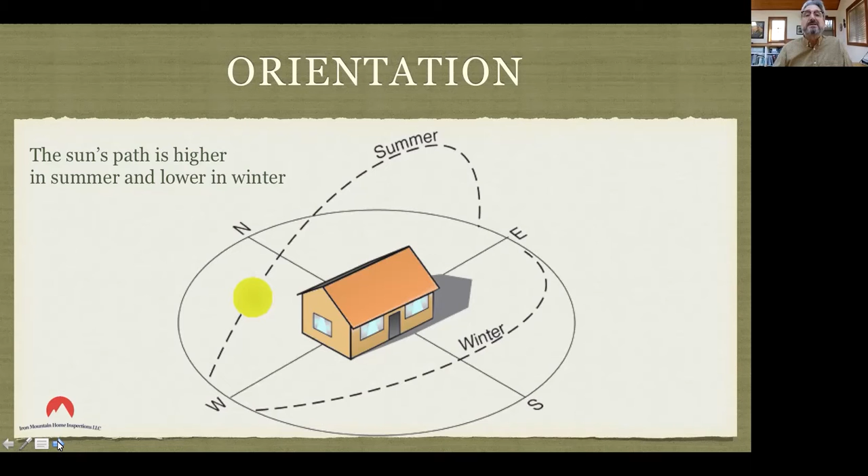Well, the reason this is important, the fact that the winter sun is lower and higher in summer, one main reason, there are others, is because many houses have wonderful, deep porches. It's a great place to sit in a rocker and enjoy the shade and chat with passing neighbors.

But a well-designed porch does more than that. Smart builders plan the depth and the height of the porch to admit low winter sunlight and shield out high summer rays. So that's a big part of porch design. Now you'll be looking at me again. So I want to talk now a little bit about thermal. Are there any questions, by the way, about siting of houses?

Okay, so let's talk a little bit about thermal mass. You've probably all walked into an unair-conditioned old house in the summertime, and you've noticed that it's comfortably cooler than the outdoors. That's thermal mass at work. While thermal mass and modern insulation both help keep houses warm in winter and cool in summer, they work in very different ways. Essentially, insulation works like a thermos. It blocks heat from flowing in or out.

But thermal mass, on the other hand, acts more like a battery. It stores heat. Then once it's saturated with heat, or the ambient outdoor temperature drops, it begins releasing that warmth as slowly as it absorbs it. Now, before insulation came on the scene, builders relied on thermal mass to help keep homes at a comfortable temperature. They did this by building with solid stone or brick.

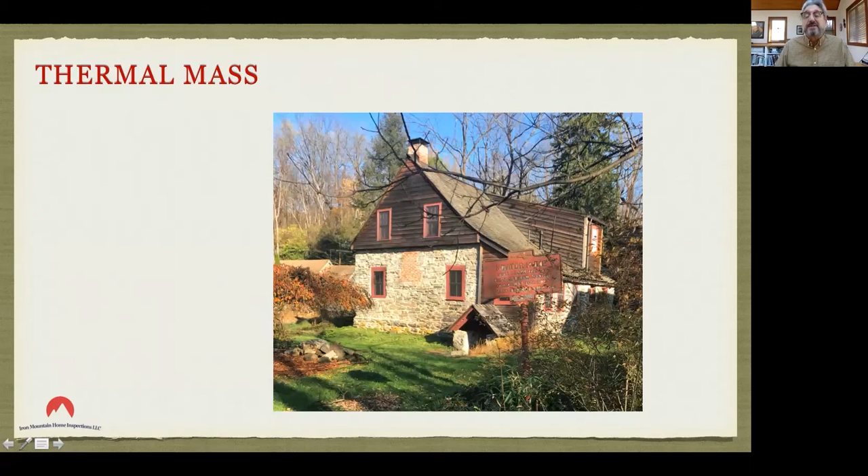In the case of timber frames, they often filled the walls with rubble stone. The rubble didn't have a structural purpose. It didn't help hold the house up or anything. It just added thermal mass. In addition, old-timey plaster also has more thermal mass than modern drywall does.

So dense materials like masonry slowly absorb lots of the sun's warmth during the day and release it during the night. This mediates the temperature in the house. It's cooler on summer days and it's warmer on winter nights.

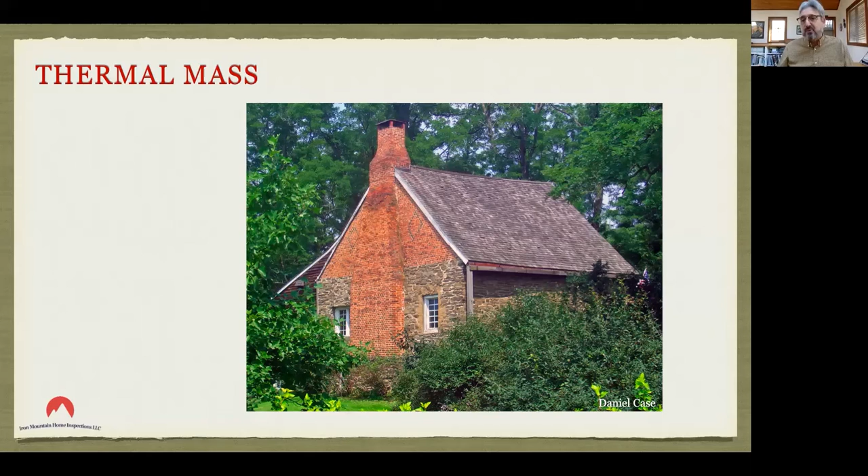Now, in our climate, thermal mass alone usually isn't enough to keep a home at the nice, steady temperature that modern folks have come to expect. But it will still reduce reliance on mechanically heated or cooled air, especially if the house has been retrofitted with insulation. In my old house, again, for example, it's on a shady lot. So that combined with the thermal mass, we often don't use our window air conditioners until August.

So any questions about thermal mass and how it works? Okay. Dave, are you going to touch on geothermal systems by chance? I'm not today, no. Because I don't know that that's really an old house issue. Pretty much the same for an old house or a new house, I would think.

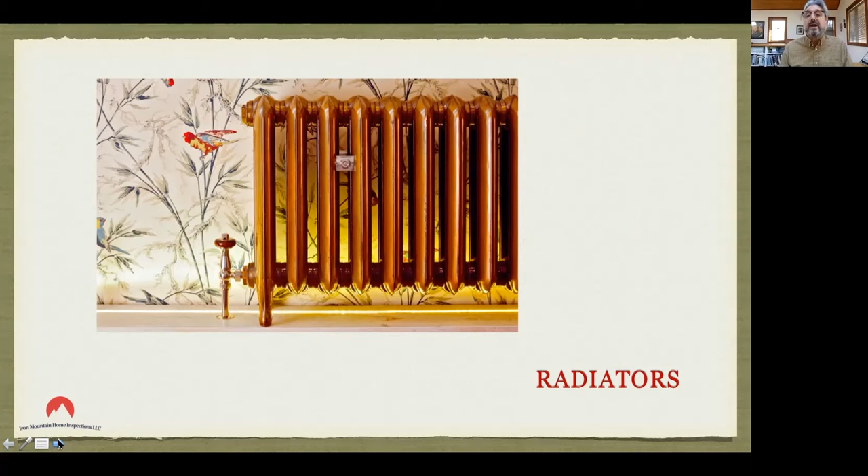Now, but I do want to touch on radiators. Speaking of mechanical heating, hot water radiators are the most common central heating system in old houses. You'll also occasionally find steam radiators. And while radiators have been in common use since the late 1800s, they're still the best way to distribute warmth throughout a house. Radiators use less energy than forced hot air systems. They provide a more consistent temperature, and they're quieter than forced hot air systems. And they don't blow dust and allergens around the house.

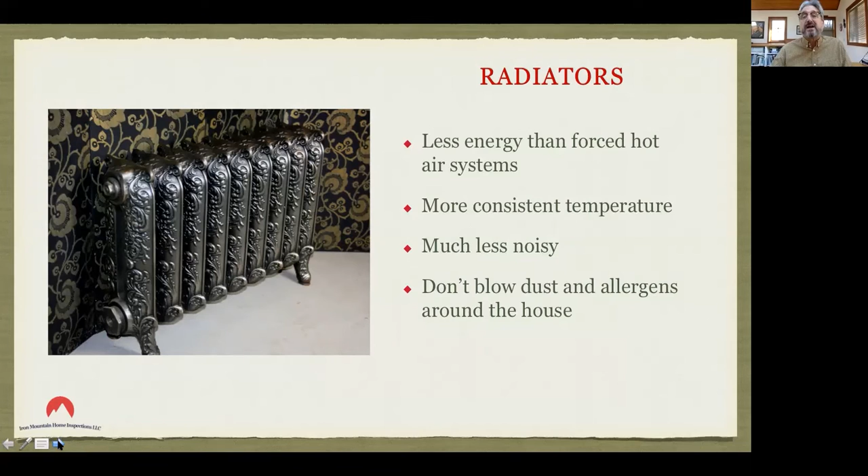So you might ask, why is forced hot air so common in new construction? Well, the answer to that is simple. While walls are open during construction, ductwork is cheaper to install than water pipes. And that same ductwork can also serve the air conditioning system. So it's a lot cheaper for builders to install forced hot air systems. But it's almost always impractical to try to retrofit ducts into an existing house. That's why most older homes that were built before central heating and were retrofitted have radiators.

Now, when hot water systems are installed in new homes, they almost always have those long baseboard radiators instead of old-fashioned cast iron units. And it's true that baseboards take up less space, and they do distribute the heat a little more evenly around the room. But for my money, I'll take the old cast iron radiators over baseboards any day.

Cast iron radiators take advantage of our old friend thermal mass. When the system turns off, radiators continue to release heat for a lot longer than baseboards do. This makes radiators more efficient, and it prolongs the life of your boiler because it will cycle less often. Plus, those ornate old radiators are just part of the charm of an old house.

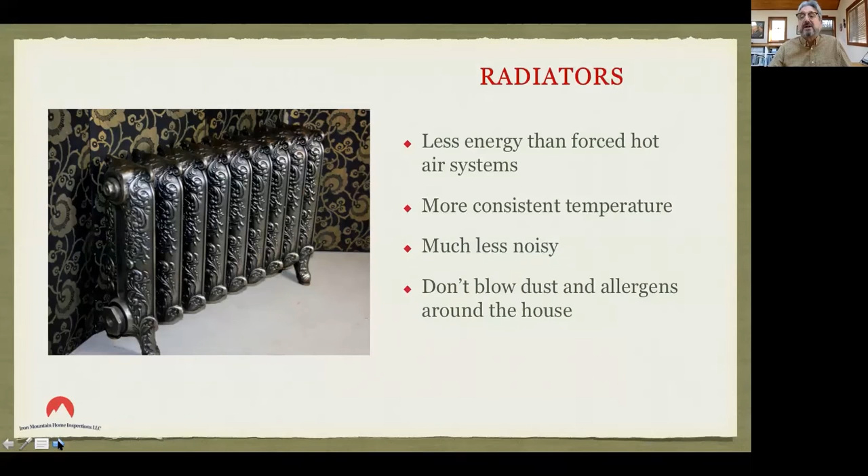So the good news is that old-timey radiators, big old cast iron radiators, can be coupled with a new super efficient boiler. And I'm lucky enough to have a system like that in my old house. And in my house, you can tell from the chimneys that the house originally had stoves. At some point, radiators replaced the stoves. And then maybe, I don't know, 30 years or so ago, new pipes were configured into 6 loops, creating 6 zones with 6 separate thermostats, about 1 zone for every room.

This is much more efficient than the old single loop system because there's a direct line to every 2 radiators. This means the water doesn't get cool as it does at the end of a single loop. It also means we're running around the house adjusting radiators. But the upside of that is it lets us heat just the rooms that we're using.

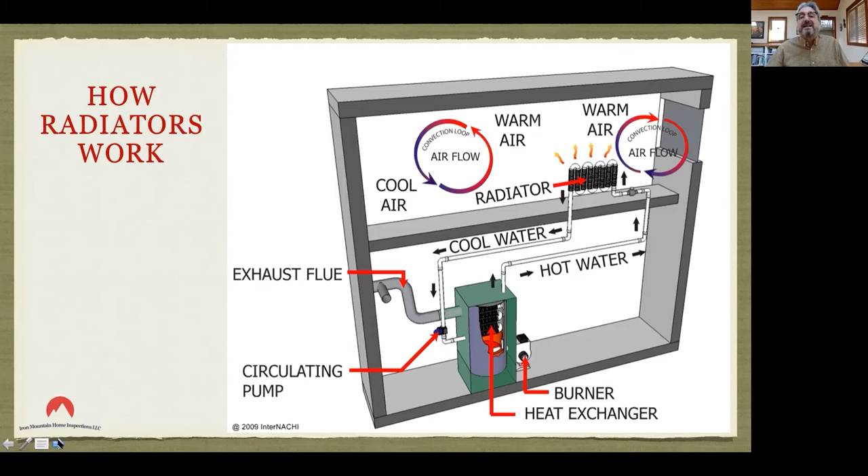Any questions at all? Dave, it's funny that you talk about the indirect hot water as opposed to a standalone hot water tank. I've always asked the opinion of a lot of home inspectors that I go through, like, what's better? And it seems like the answer is a little bit of a mixed bag, because you're firing your boiler throughout the warm months when you have an indirect system versus a standalone hot water heater.

But I guess it does seem to be a little bit more efficient. But then again, your boiler's working a lot more, and it's a much more expensive unit than just a standalone hot water heater. That is true. Keep in mind, though, that you are using one zone. So if it's set up that way, all the burners on the boiler aren't coming on. Probably just the one for that one zone.

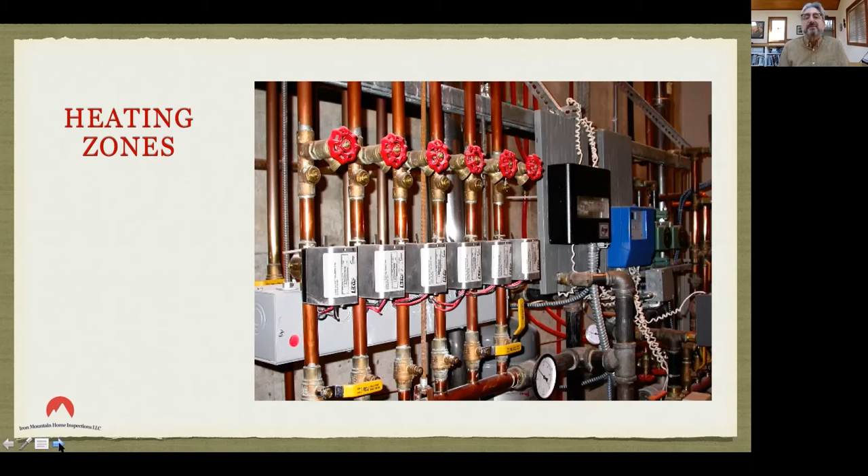Now, as I mentioned before, there are some good reasons to replace windows in an old house. Of course, they're double pane typically, so you don't have to hassle with storm windows. And they operate very easily, and some actually tilt out for cleaning, which is very nice and convenient.

Many of them don't require painting. I mean, most common replacement windows are vinyl, which of course you don't paint at all. And then you'll have vinyl clad with wood, which often has wood exposed on the inside, but clad with vinyl on the outside. So you could paint the inside, but not the outside. Then there's aluminum, which you never paint. And some windows now are made out of fiberglass, which you can paint, but you don't have to.

However, as I mentioned, replacement windows won't pay for themselves in energy savings. And here's the reason why. New windows are indeed twice as efficient as a single pane, but they're only 15% more efficient than a single pane with a storm. Since windows cover only a small part of the total house envelope, new windows typically only save about 5 to 10% in energy costs.

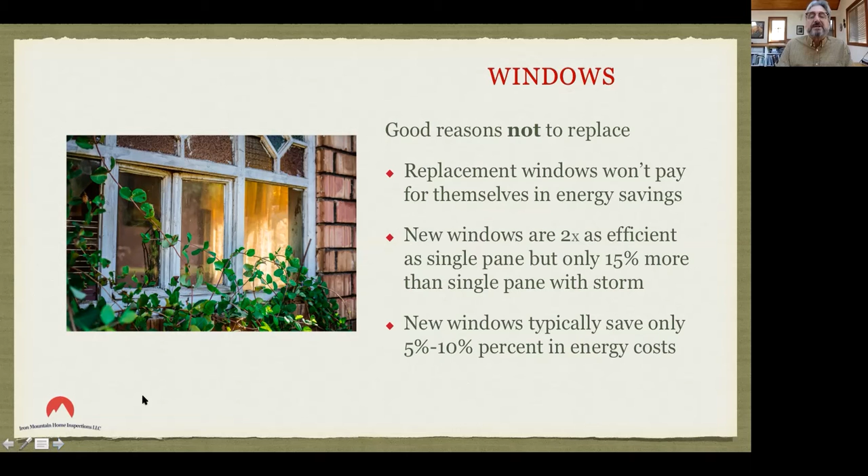I wanted to mention some other considerations here when it comes to replacing windows. Now, as I mentioned, new wood windows typically are clad with vinyl on the outside, at least. Rarely do you see totally wood new windows. And the reason for that, I believe, is because new wood really doesn't stand up well to moisture, even when it's painted.

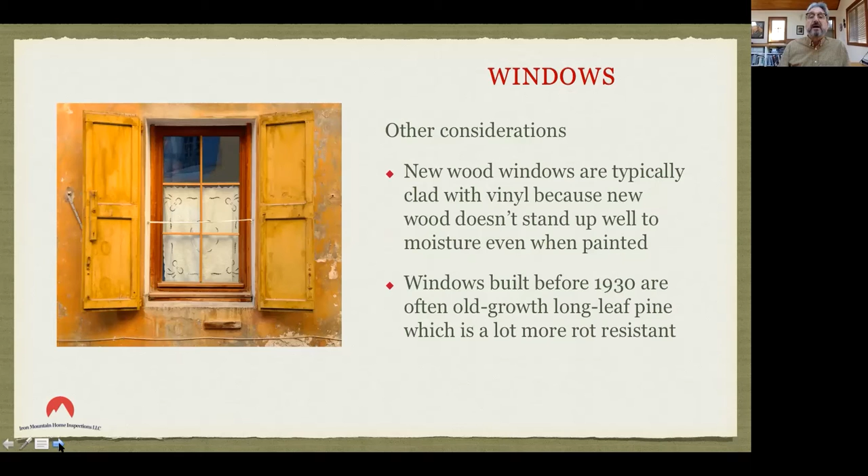Windows built before 1930, on the other hand, are probably made out of old growth longleaf pine. We'll talk about that a little bit more later, but old growth wood, particularly old growth longleaf pine, is a lot more rot resistant than contemporary woods. The other thing is that old windows, oops, had a little technical problem here. Oh, okay, so unless they're in really bad shape, old windows take more elbow grease and skill to repair.

Scraping out and replacing putty is the most common repair, and something just about anybody can learn to do. So if you have some young, energetic clients who are looking to get some sweat equity out of an old house, this is one really good way that they can do it, and really start getting some experience in fixing up a house, because it's pretty straightforward.

And another thing is that when the proverbial baseball goes through the window, with old windows, a broken pane just means a trip to Wadeson's or some other hardware store where they'll cut you some replacement glass that you can put in. Whereas with new windows, you're breaking that factory sealed double pane with perhaps argon gas inside. And a lot of times that means you need a new window.

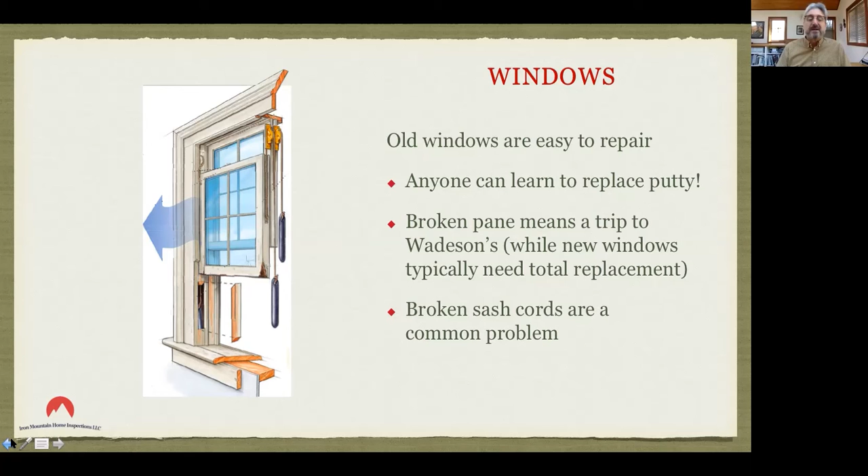Well, that's one of the problems with a lot of replacement windows, particularly vinyl, because vinyl needs to be wider to have the structure it needs. Often the area of the window is reduced, and they can look really bad in old houses. Yeah, they do. Okay, anything else? Anybody? Okay. And now speaking a little bit about storm windows.

When we think about storm windows, typically we'll think about those knuckle-busting aluminum ones that are never easy to get up and down, and they look kind of bad, particularly on an old house on the outside. And then there's the even older 1865 farmhouse. Yes, exactly. And then there's the older storm windows where you've got to get up on a ladder and put them up and down.

Actually, I had those in a house I lived in in Frenchtown, New Jersey, and they were all nicely stored in the garage, and they were all labeled. That was very considerate, except they were labeled Jill's left window and Bob's right window. So I never could figure out which one went where.

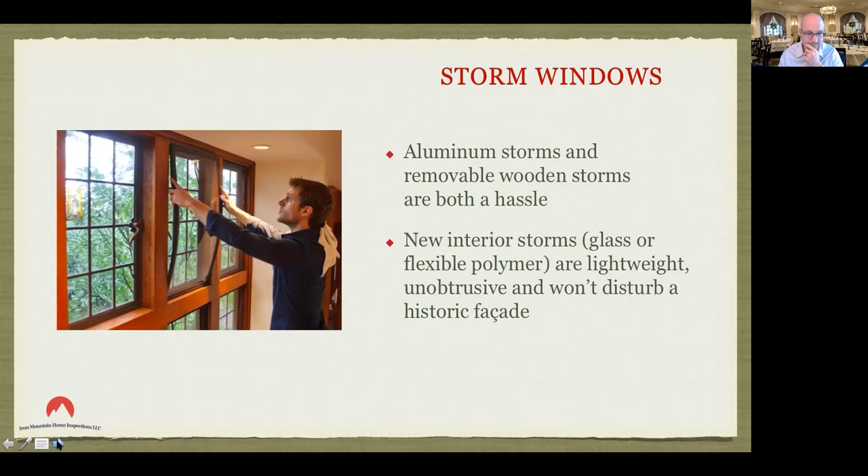But nowadays you can get new interior storm windows. They're made of glass, or as you see in this image here, flexible polymer. And they're very lightweight. They're unobtrusive, and they won't disturb the historic facade. So that's something to consider. Where do you get those, Dave? I've never seen that before. That's a good question. I'll find out and drop you an email. That'd be great. Sure. Let me make a note. Okay. All right.

Now let's talk a bit about water. As I mentioned, water is the number one enemy of any house. Any house, as long as it's in good repair, does a good job of repelling rain and snow, as long as your roof is in good shape and you have gutters that are working properly. And that's the case whether the house is new or 100 years old. But once you heat or cool a house and make it anything that starts to approach airtight, you create a more insidious, usually hidden problem.

It all starts with a dew point. That's when water vapor in the air hits a surface and cools enough to become liquid water. You've probably seen that on a humid day on a toilet tank. When the moisture in the air hits that cool toilet tank, it turns to water and can actually start to drip. Well, that can happen inside walls. And if enough of that water becomes trapped for long enough, say between the insulation and the wall or in a bathroom linen closet, the result can be mold and/or rot.

Now, before houses were tightened up with insulation, weather stripping, and storm windows, water vapor rarely got trapped and the dew point wasn't a problem. Plus, old plaster walls allow vapor to escape more easily than modern drywall. Well-designed modern houses provide escape routes for air to prevent more moisture problems. For example, as you probably know, if you see insulated attic rafters, you also want to see ridge and soffit vents.